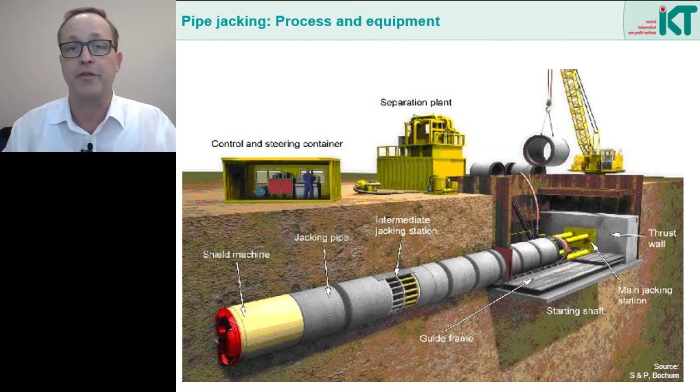To explain the balance of forces needed for pipe jacking, we see here a sketch from a well-known textbook by Dietrich Stein. If we look to the right, we see there a large V for the jacking force. This jacking force is introduced into the pipe string in the starting pit. To generate it, we need appropriate jacking presses and an abutment. The abutment is needed to support the presses on the opposite side of the starting pit. The press forces must now be at least so great that we can overcome all the resistances in the pipe string.

And these resistances are made of two groups, as we already know. Number one, the resistance in front of the jacking machine, at the shield, marked with an S. This pressure must be at least so great that the ground does not collapse and that we can easily remove it. However, it must never be greater than the so-called passive earth pressure, because otherwise we push the soil further forward and there is uplift at the surface.

The second resistance is the frictional force R. As you know, we have to push all the pipes through the ground one after the other, and this means that the entire outer surface of the pipeline must be slid past the ground. And this sliding creates friction and thus a corresponding resistance.

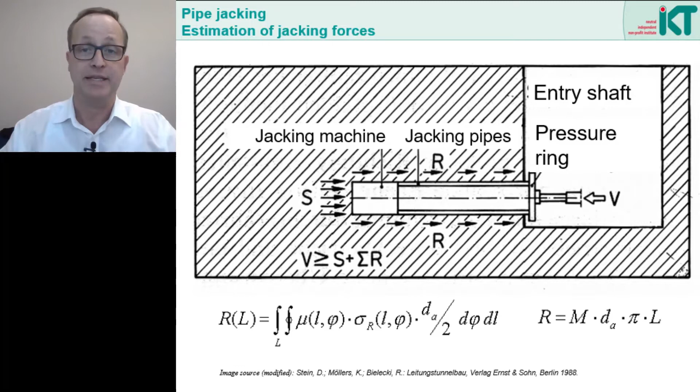So what does that look like? Well, we can see that here. The intermediate jacking stations are installed when the jacking forces have reached the maximum that the pipes can withstand. The presses are then installed between two pipes over the pipe circumference. They are supported by the rear pipe and they push the front pipe further forward.

In this picture we can see the process with several such intermediate jacking stations. Above at 0 we see all jacking stations, that is A, B and C. No press is extended in this state. A is the main jacking station, B and C are intermediate jacking stations, and D is the shield in front.

In the first step, the intermediate jacking station at C is extended so far that the entire front pipe section is pushed forward by the length of small a. The shield then must remove as much soil as is needed for this movement.

In the second step, the intermediate jacking station B is extended again by the same amount, so that station C can be pushed together again. In the third step, the main pressing station A is used. It pushes forward until all intermediate pressing stations are retracted again.

The whole process continues until there is enough space at the main jacking station for the next pipe to be installed. And then it starts all over again at condition 0. As we can see, the whole thing can be easily dimensioned from an engineering point of view.

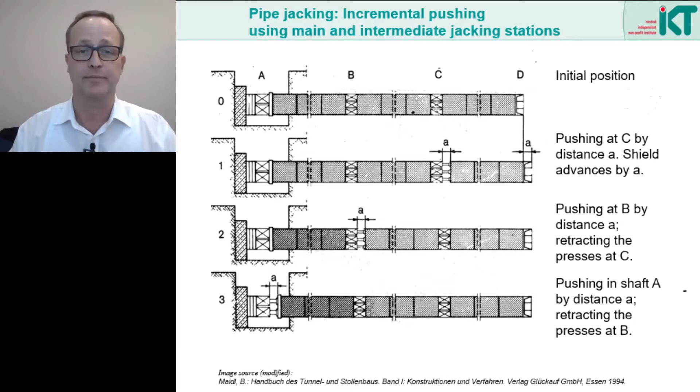However, this picture is a straight line jacking process without any problems with the ground, no obstacles that disturb and no steering curves at all. And that brings us to the second point: what technical risks do we have to expect in pipe jacking?

To answer this question, let's take a closer look at the pipe jacking process in practical pictures. First of all, we have the starting shaft on the left with the jacking presses, a pipe and an abutment on the opposite side of the presses. The construction of the load transfer into the abutment and into the underground are special challenges.

On the right we see the example of a soil excavation, here with a road header or selective cut heading machine. Normally during pipe jacking we have the shield there which rotates and excavates the soil. The soil has to be supported by the shield at the front, and in the annular space by the supporting fluid, the bentonite. But now we want to concentrate on the middle picture.

We can see the pipe and the means for pressure transmission between the pipes. In the picture we can see how a wooden ring is mounted on the pipe mirror of the front pipe. This wooden ring has a very special task: it should transfer the longitudinal forces from the rear pipe to the front pipe.

Such rings are therefore also called pressure transmission rings. They are located in every pipe connection. So let me summarize: essential constructional elements are the starting pit or entry shaft, the jacking press and the pipes.

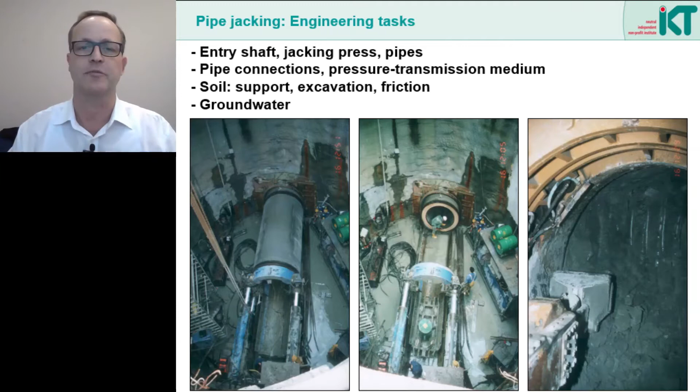You may have already noticed the soil, the pipe connections, and the pressure transmission means are of particular interest to me, and there is a good reason for that.

In pipe jacking there are not only straight line pipe routes. In this picture we see how the pipes lie in a curve. Such a curve is usually planned before and may be necessary, for example if there are obstacles or if an undercrossing of a river is needed. And in consequence there are challenges.

The pipes themselves usually cannot be bent around the curve. A jacking pipe should absorb jacking forces and is therefore usually very stiff. Large pipes, for example, are usually made of reinforced concrete, so if the pipe is to be bent around a curve, all bends must be made in the pipe joint.

However, this also means that in a curve the pressure transmission ring is very strongly compressed on one side, and at these points the stresses in the reinforced concrete are also very high. Any miscalculation or steering error can then lead to damage, such as spalling of the concrete.

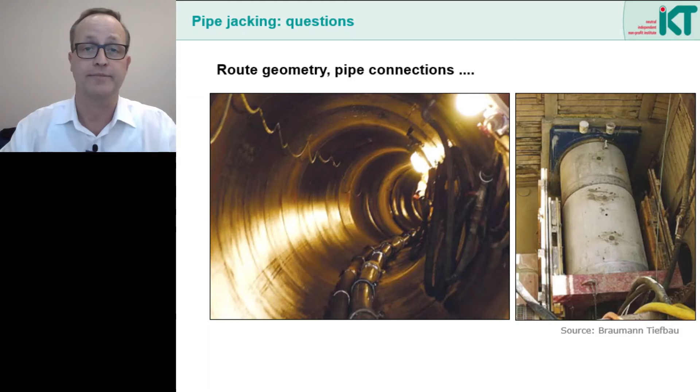Here, for example, we see some damage scenarios from practice: spalling at the joints, whether inside or outside the pipe, and cracks of smaller or larger width.

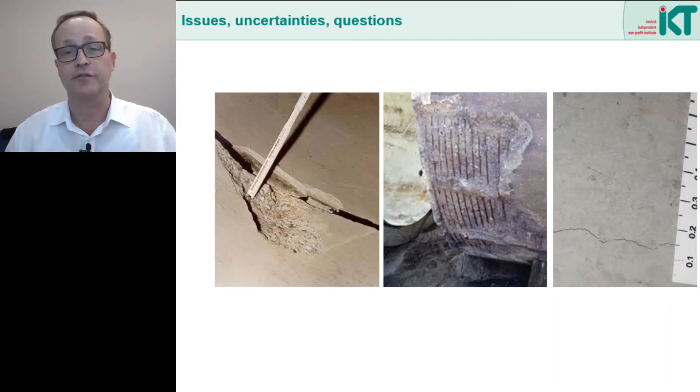All this makes us uncertain and we are looking for an explanation, and of course for appropriate countermeasures.

An explanation for the high stresses at the edges can be found in the geometry of the pipe connection. The pipe ends lie parallel to each other. In the case of an angle joint, there is a linear distribution of strain in the pressure transmission ring. Depending on the material law, high strains then lead to more or less high stresses in the highly compressed area. If the material is plasticized, high stresses can be avoided.

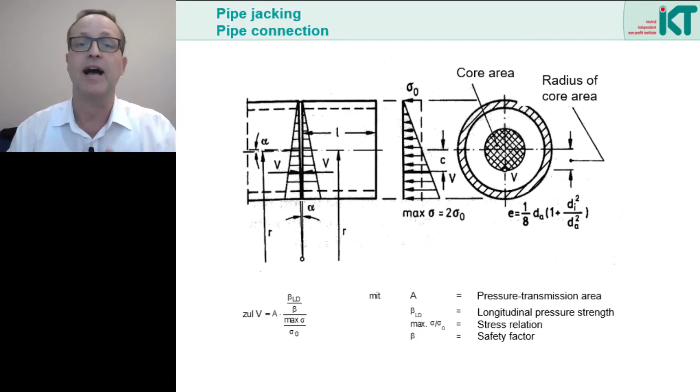Against this background, it is important to have a precise knowledge of the material behavior of the pressure transmission means. And there are big differences.

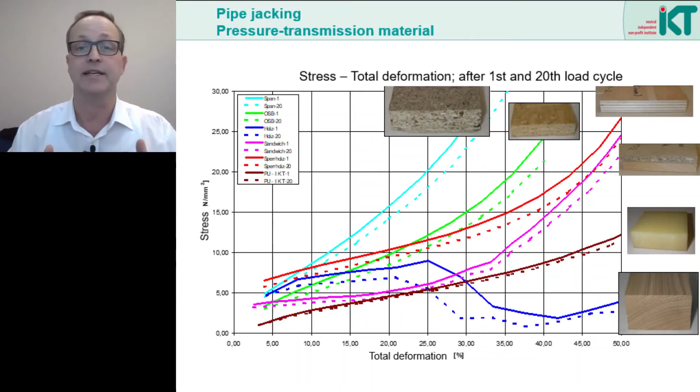With solid wood, please keep in mind the fiber orientation really makes a difference. Here we see a ring that was obviously assembled from 2 different solid woods with different fiber orientation, and this leads to uneven load-bearing behavior, because the strength in the fiber direction is much higher than transverse to it.

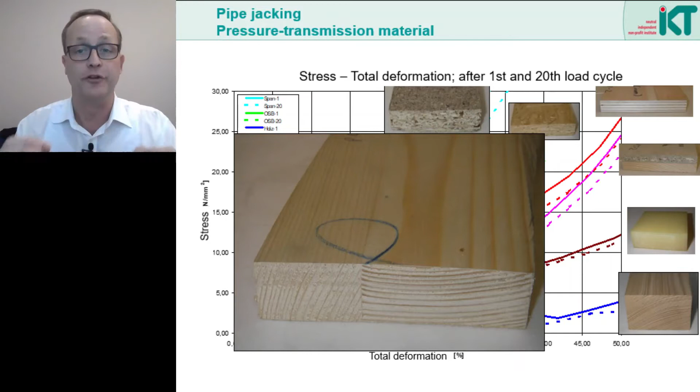This brings us now to our research project, where we took a closer look at the quality influences and at the options for quality assurance.

The first thing we did was to look at practical construction sites. This was done at a large German water association which had already carried out many pipe jacking measures, but was also planning many more. In doing so, we determined which conditions and scenarios usually occur in practice.

Even with the straight line, however, there are always deviations from the target route. This is the reason why the tunneling machine must be steerable. By steering the shield, the deviation is compensated, followed by the return to the target route. Afterwards, the pipe route continues straight on.

The second straight line is then followed by a planned curve. Such curves are needed to avoid known obstacles or to follow the course of a road, for example. Finally, we come back into a straight line, and finally the pipe jacking is completed.

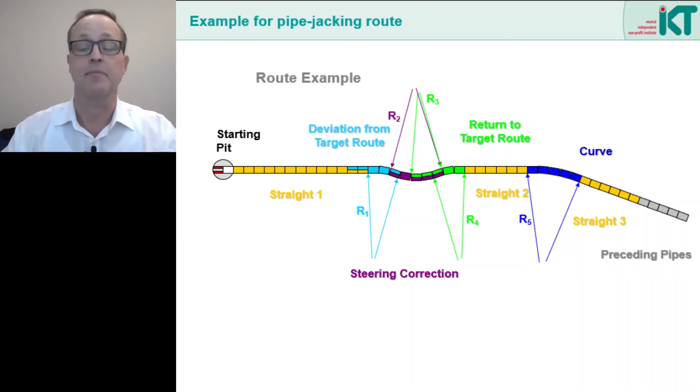And that is how we did the large-scale tests at my institute, the IKT. Here we see a top view of the experimental setup. The whole thing is called the IKT Pipe Jacking Simulator. On the outside we have a massive steel vessel, which is the actual large-scale test stand at IKT.

On the left, the pressure jacks thrust from an abutment onto the pipe string. The pipe string itself consists of 5 jacking pipes, each with a diameter of about 2 meters. On the right, the last pipe is located in an articulated support.

The jacking abutment is connected externally to the test stand, so that the abutment forces can be transmitted into the test stand itself. But the most interesting element are the lateral forces, provided by 8 lateral pressure jacks.

These jacks are connected to steel rings in which the pipes are held. Between the pipes and the steel rings, we placed special hydraulic cushions which ensure an even bedding of the pipe within the steel ring. The rings themselves lie on Teflon plates so that they can be moved easily sideways.

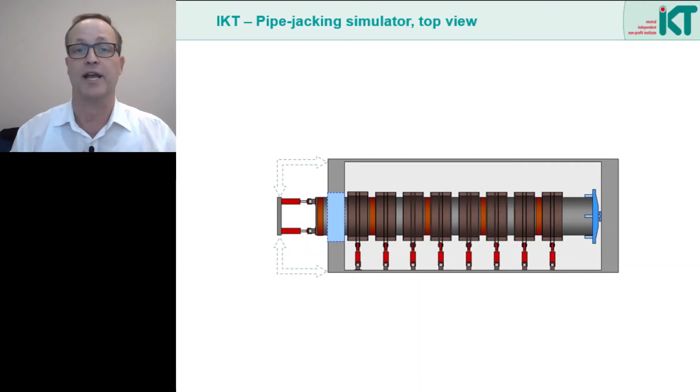This makes the purpose of the whole thing very clear. With the horizontal jacks, the pipes can be positioned in such a way that we can simulate all important pipe jacking conditions in the test stand on a scale of 1:1.

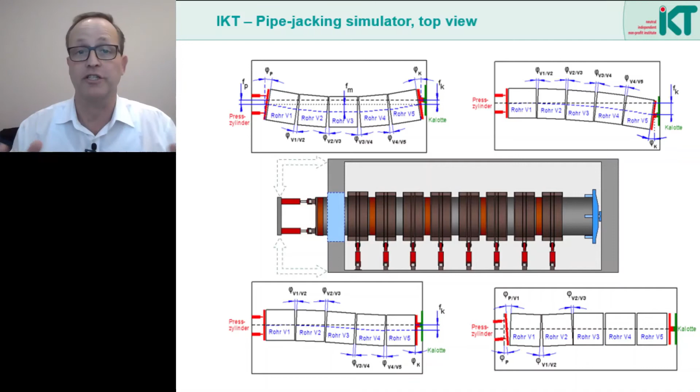This also means that we can traverse the sample route again and again in the same way and compare the results, for example for different types of pipe or different pressure transmission rings. After all, this is not possible in practice because the soil conditions in the route of the pipeline vary from site to site. In these pictures, we see how the test stand looks like in reality.

In the upper left corner, the pipes are placed in the steel frames. Under the pipes and on their sides, hydraulic cushions are positioned as bedding. Below we see how the pipes are placed one behind the other and how they can be positioned with the horizontal pressure jacks. On the top right, we see our measurement technician working directly under the horizontal jacks.

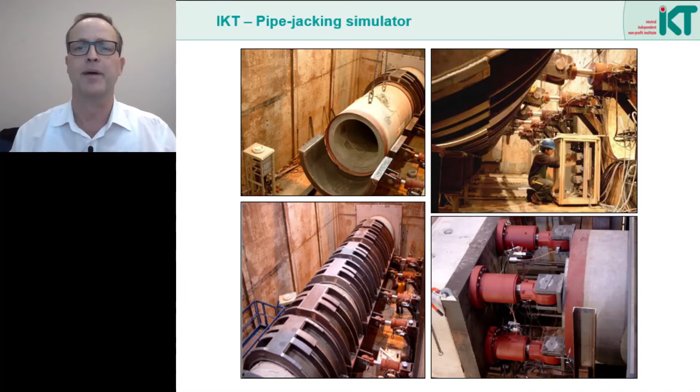And below on the right, there you can see the main jacking cylinders. With these, we were able to apply jacking forces of 8 meganewton, which is about 800 tons. This is quite representative of a typical pipe jacking site and well enough for our sample route.

Here at the top, we see the test setup and below it, the corresponding part of the route. There is also a sketch for the structural system, which is simulated here. With a straight line, we started a total of 10 load cycles as average for the pushing of the pipe into the straight line.

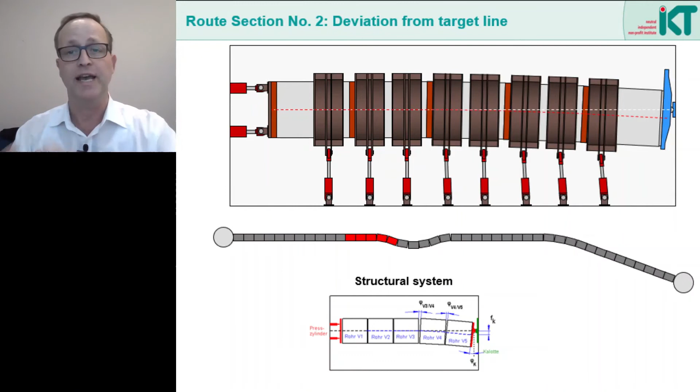From the straight line, the route continued into the deviation from the target route. Then the steering correction, the return to the target route, and then the second straight line, a planned curve, and finally the last straight line.

Of particular interest were the pipe stresses and strains in the planned curve shortly before the end of the pipe jacking route. In terms of statics, the curve is often the critical condition to which the entire system is dimensioned, meaning the pipes and also the pressure transmission rings.

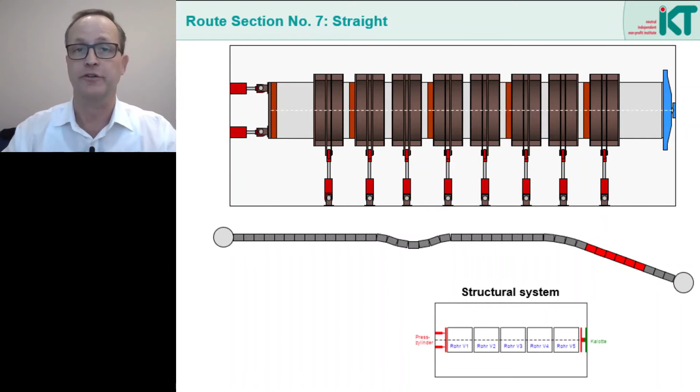This seems very logical at first glance, because if we press the string from the left and from the right, the resulting force must go outwards. An even bedding, well, that seems a quite natural assumption.

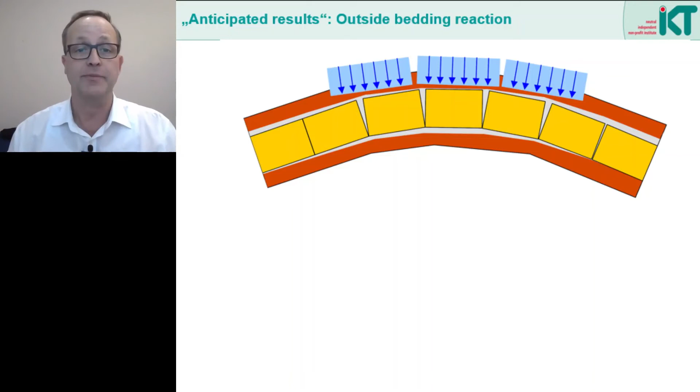But the nice thing about our experiment was that we could measure in the hydraulic cushions what really happens in the bedding. And of course, we and all the experts who accompanied the project expected the following: that we would be able to measure a very even bedding reaction on the outside of the curve. Anything else would not be logical, at least we thought.

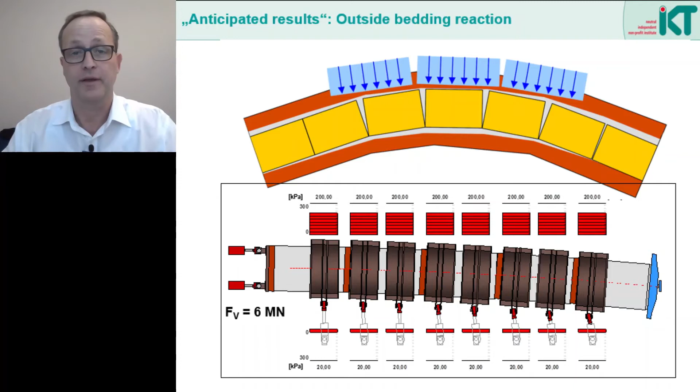Well, and then came the results. We can see very quickly that everything looks very different. The pipes are held on the outside, but this is especially true for the first and for the last pipe.

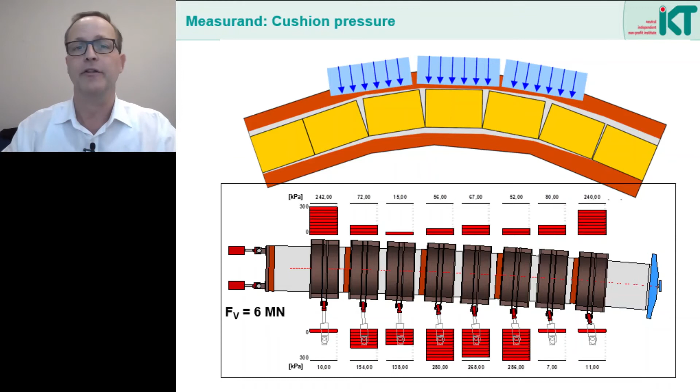The pipes in the middle, on the other hand, are held on the inside. That means that the whole thing actually looks like this. The pipes in the middle obviously want to pull themselves straight, and the outer support forces are only found at the beginning and at the end of the curve.

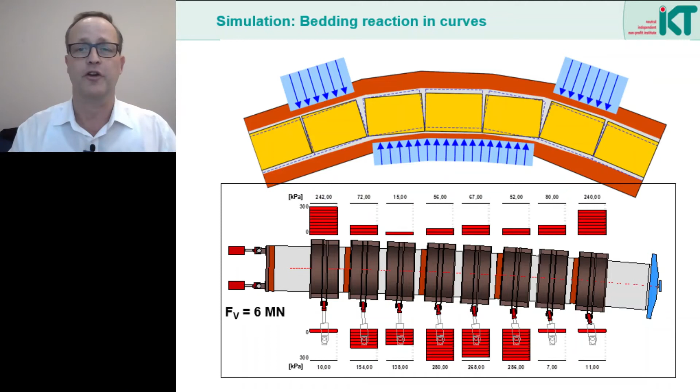But this also means that the pipes are under very different loads than expected. In the first and last pipe connection in the curve, there are considerable transverse forces. Furthermore, the pipes are no longer evenly distributed in the curve. In the middle of the curve, the angle might be small, but in the other joints, it must be all the greater.

The movement of the pipes and the gap in the joints therefore may differ from pipe to pipe. We could also say the pipe kinematics are not as ideal as we had imagined in the statics up to that point. This also means we must expect larger gaps in some pipe connections and therefore also larger stresses on the compressed side of the pipe. This was a very important finding, and it was incorporated into the rules and regulations and the safety considerations of structural engineers in Germany.

Under such conditions, however, something else is also important. We now need to know even more about how the pressure transmission means behaves under extreme loads. Therefore, we have also carried out many investigations in this field, and it was particularly interesting to see how the various pressure transmission means deform in comparison to each other.

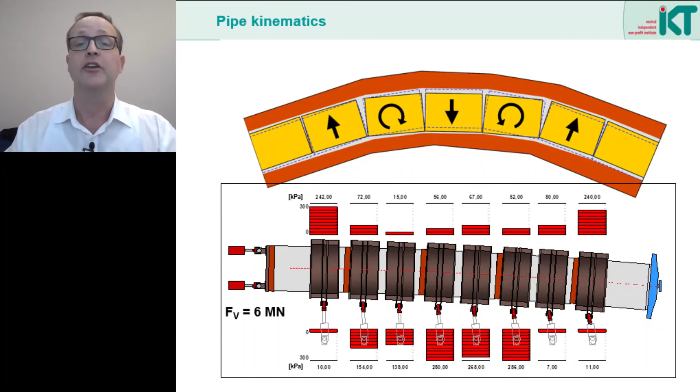Here we see test specimens of pressure transmission means which we subjected to typical jacking loads. 5 different load tests were carried out for each material, with 5, 10, 15, 20 and 30 megapascal compressive stress, each with 20 load cycles.

The individual test specimens are shown in this picture, stacked on top of each other. 3 of the stacks are made of wooden materials, and the last stack on the far right is made of plastic, namely PU, that is polyurethane. Once a solid wood was tested, once a V100 chipboard, and once an OSB chipboard. OSB means oriented strand board.

In all cases, the wood also deforms plastically. This also means that the wood adapts well to the concrete surface. In addition, wood has a low transverse elongation, so low lateral strains, which means that there are only small splitting tensile forces in the concrete.

The plastic far right, on the other hand, is comparatively elastic. All test specimens have returned to their original geometry after being unloaded. However, the lateral strains of plastic are significantly higher.

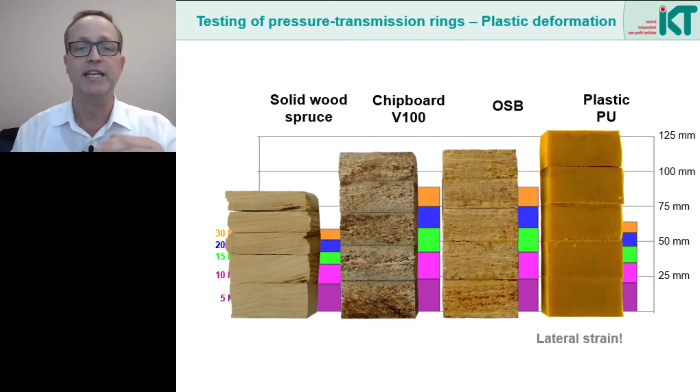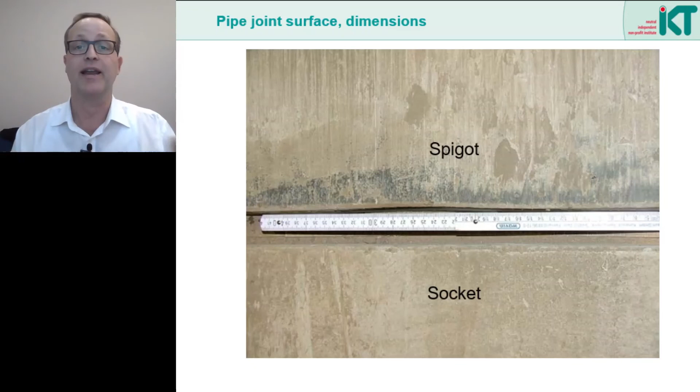In our large-scale tests, we then looked in more detail at the stresses that occur in the pipe joints, depending on which pressure transmission material is used. For this purpose, we used the foil sensor measuring system in the pipe joint between the second and third pipe. The picture shows the cross-section of the measurement joint.

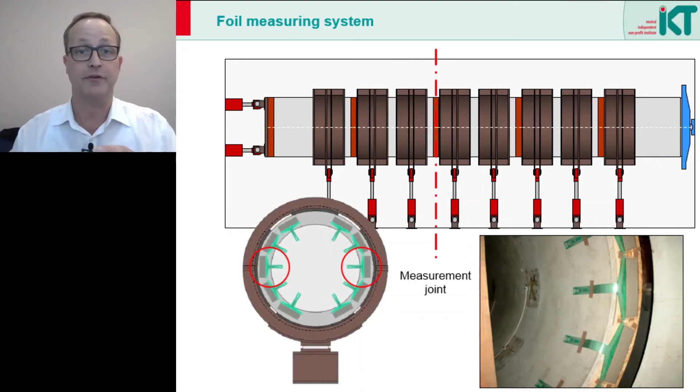The foil sensors are mounted in the spring line of the pipe and above and below it. The stresses were then measured continuously over the entire simulated jacking process. Let's now take a closer look at the results for the foil measurements in the left and in the right extreme of the spring line.

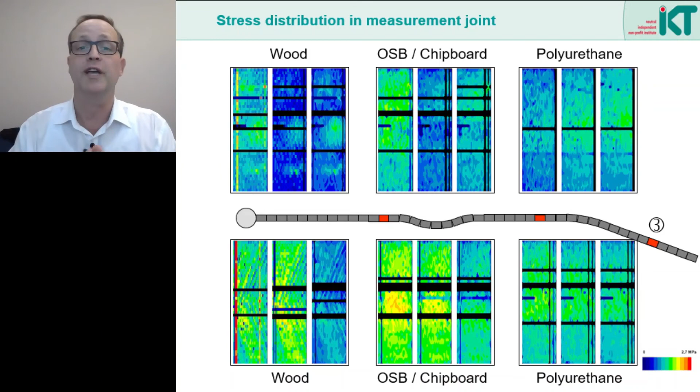Well, the answer is simple. The loads are now increasingly transmitted via the crown and the invert of the pipe. However, this means that after a curve, higher risks can be expected for the crown and for the invert. If they are subjected to higher stresses because of a rise in jacking forces, then this too can lead to cracks or spalling. So we have learned, the pipe string geometry is not ideal.

Large angular displacements can occur during pipe jacking, especially in curves. In the curves, the pressure transmission means are subjected to extreme stresses. So what does this mean in practice? Well, we have to follow the pipe jacking process with measurements.

Since only one curve was planned, OSB rings were used as pressure transmission means between the pipes. The gaps in the pipe joints were constantly monitored in order to detect excessive stresses in good time.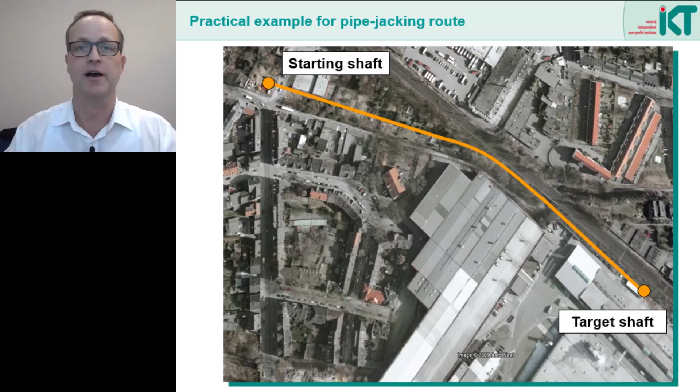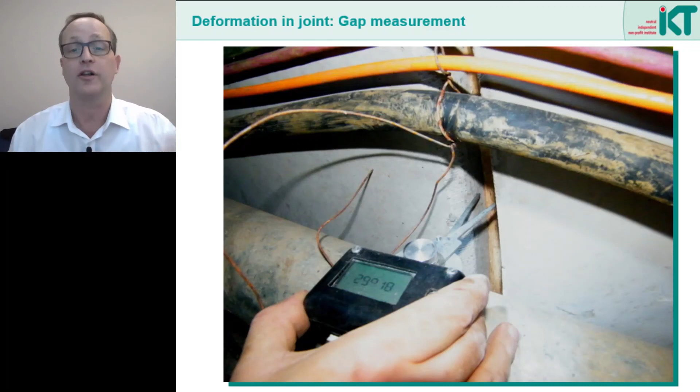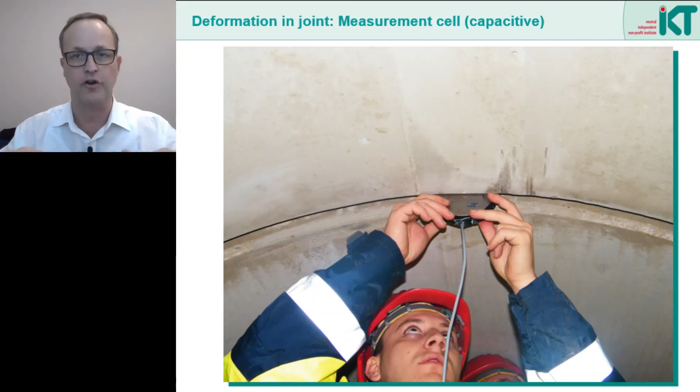For longer jacking runs with alternating curves, it can also be useful to install a measuring sensor permanently. Here we see a measuring box for distance measurement, which is pushed into the pipe joint. For this purpose, a small gap was left in the pressure transmission ring before. Here, the measuring box is installed at the crown of the pipe, which is particularly useful for vertical curves, as high stresses can then be expected in this area.

And this brings me to the conclusion of our topic today, pipe jacking. I think we have learned some interesting aspects. There are main pressing stations, intermediate pressing stations, and of course the pipes and the lubricant or support in the annular gap. We have to work with great forces to overcome the resistance at the working face and the friction between the ground and the pipe surface. In the starting shaft we need an abutment and we have to deal with the soil and the groundwater.

Quality assurance plays a particularly important role. I have presented some results of our research. We have learned that there is no such thing as ideal kinematics in a curve. We have to expect both large gaps and extreme stresses in individual pipe joints. The pressure transmission means then has a great influence on the load distribution in the pipe joint, especially when negotiating curves.

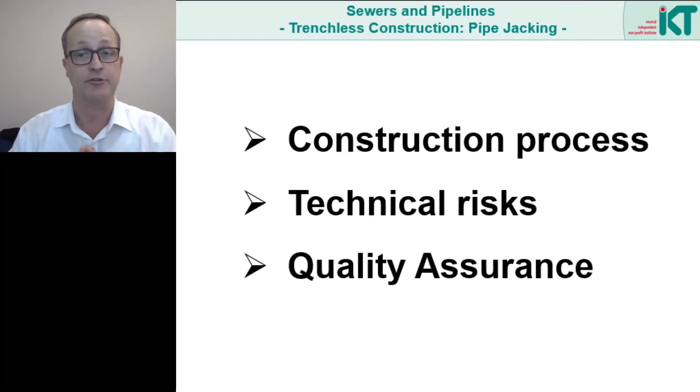And there are different materials for pressure transmission. For straight lines, wood, especially OSB, is an economically sensible solution. The material is cheap, adapts well to the surface, and has low lateral strains. When negotiating curves, however, elastic behavior is required. Here the use of plastic can be useful. And finally, it seems a good idea to closely monitor the deformations in the pipe joint so we can detect risks in good time. Thank you.